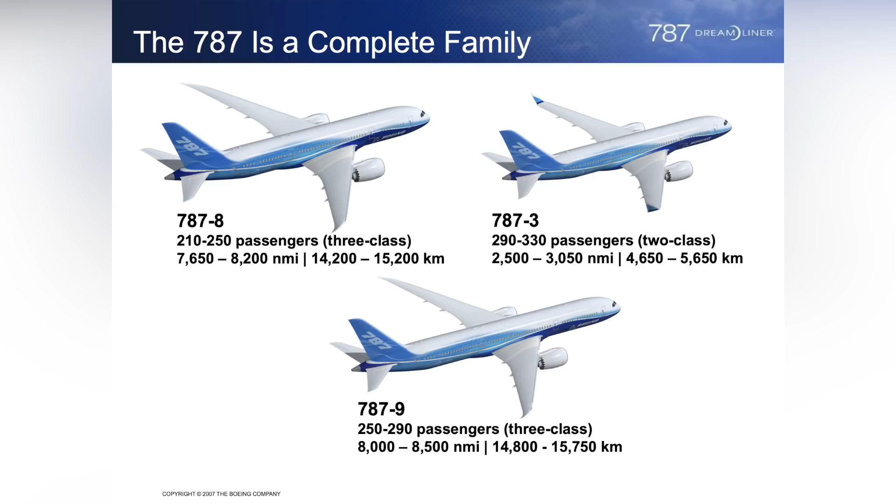So the whole concept of this airplane came to pass with respect to how do you build a 787? And more effectively, how do you develop the supply chain for the 787? You've got vendors all over the world. You've got two different build sites for the assembly of the airplane. You've got Everett, Washington, and Charleston, South Carolina. At that time, we had the 3, the 8, and the 9. The 3 never got built, and they built the 10 instead. So, in simplest terms, we had a lot of pieces that had to come together in many places.

The 787 was built because of market need. Boeing doesn't build anything unless they think they're going to make money with it, or at least sell them. Making money sometimes is a benefit, but with respect to the 87, there were a lot of promises made that didn't happen because I don't think people really appreciated the whole depth of the program. New techniques, new materials, new engines, new flight controls, just a whole new airplane. So there were lots of different things that happened, and the market was strong to build these airplanes.

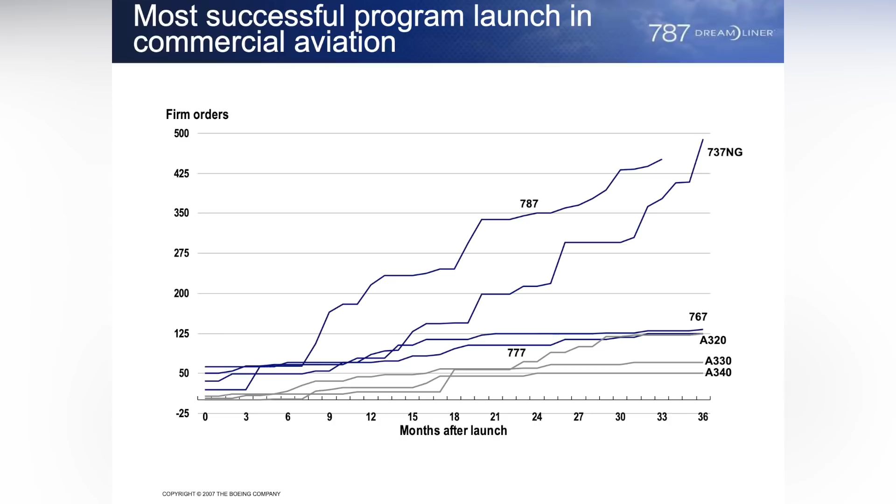We predicted that there were lots of customers. They sold like hotcakes. People wanted them. They had firm orders right at the beginning for 514 airplanes from 43 airlines. And there were more and more coming on all the time. But the airplane was progressing slowly. So at least the build cycle had to be as efficient as we could make it. So it was the most successful launch in history of the Boeing company.

The schedule, as you can see, changed because they predicted the thing would fly in 2007. When did it really fly? 2009. It was supposed to deliver in 2008, delivered in 2011. In the meantime, airplanes were stacking up and stacking up. So again, how do we get those pieces together? And one thing we'll talk about is the fact that there were sub-assemblies that came from all over the world. And we had to have the ability to ship those sub-assemblies to Boeing and do it efficiently.

So as you can see, we had to build a very big airplane. Are we going to certify this airplane? Is this going to be a restricted airplane? Is this going to be a limited use airplane? How do we do this? They needed volume of 65,000 cubic feet. That's 3 times the capacity of a 747-400 and 50% more than an Antonov 124.

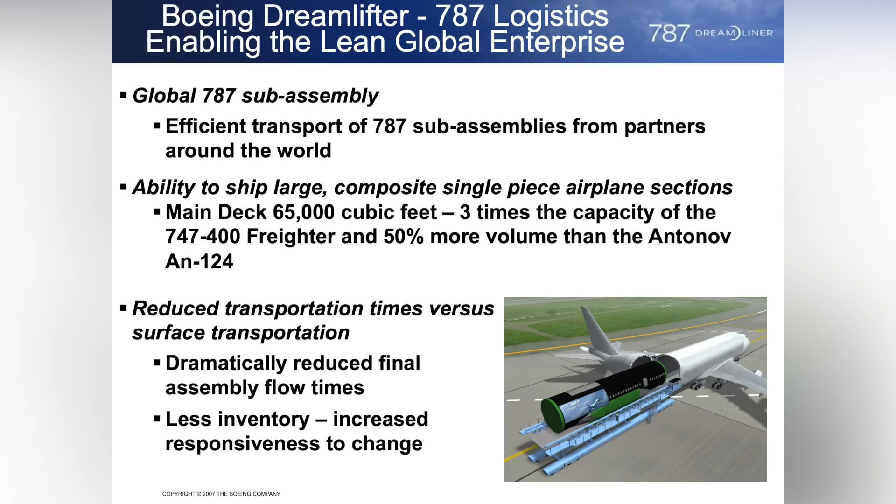If we shipped that material by barge, it would take weeks. So we flew it. We had less inventory that we had to keep on at the facilities. We had no corrosion issues to worry about with respect to hauling things by barge. That was always foreseen as a backup, and there are, believe it or not, docks at Charleston and at Everett, Washington that could handle a barge with parts. They were built just in case.

So where did the parts come from? You can see they came from all over the world. The trailing edges came, and they were able to truck those. The center fuselage came from Alenia, which is in Italy, near Naples. Forward fuselage came from Spirit in Wichita, Kansas. The main landing gear came from Kawasaki Heavy Industry in Nagoya.

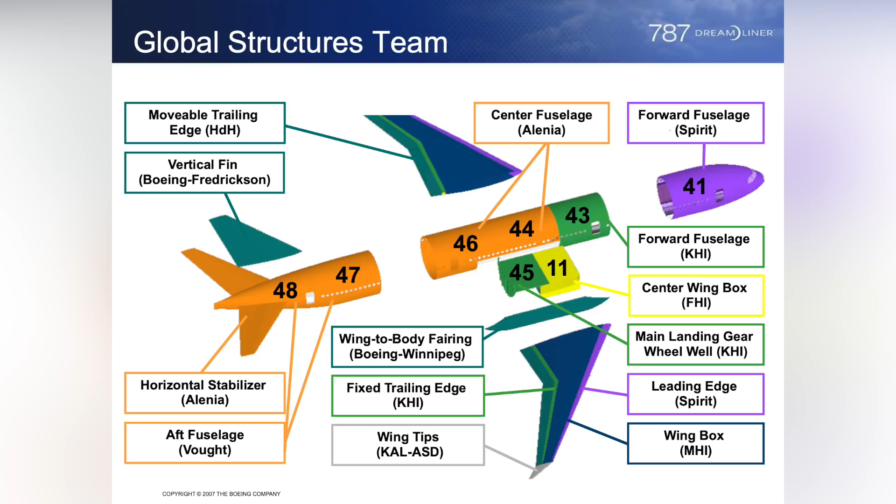Leading edge devices also came from Spirit Wichita, the wing box from Mitsubishi Heavy Industries, KAL-ASD did the wing tips, and Boeing Winnipeg. Other parts were bought, and some parts were actually built by Boeing. I know it's amazing, what a concept.

So, how do you move that many parts from that many people, building it efficiently? It's not easy. So, believe it or not, this is one of those legendary designs that came up more or less around a coffee table with a lot of wine.

At least that's the legend. I'm not sure that really happened because nobody drinks at Boeing because it would be illegal.

So the airplane was put together and we built a route structure, and how did we do this? How did we get these things apart? And you can see that it was somewhat convoluted looking. On the right side of that slide, you see the little Nagoya parts coming out of Nagoya. In the center of the slide, the parts coming out of Italy. And then on the left side, you can see the hop, skip, and jump across the United States between Wichita, Everett, and Charleston.

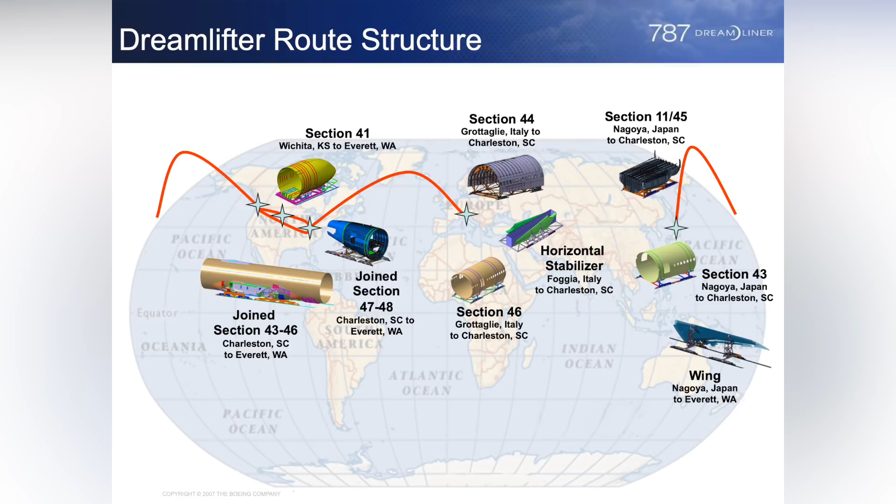So we can kind of get a grasp of the size of some of these components. Those are big fuselage pieces. So where did we build this thing? Well, Boeing didn't have the capacity to build it. We were building 87s. We were building lots of other airplanes there at the time. So, guess what? They went to EGAT in Taipei.

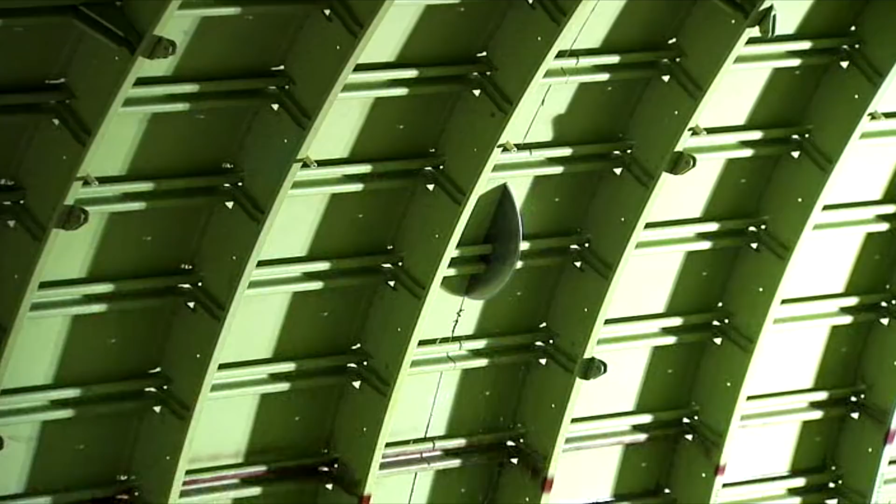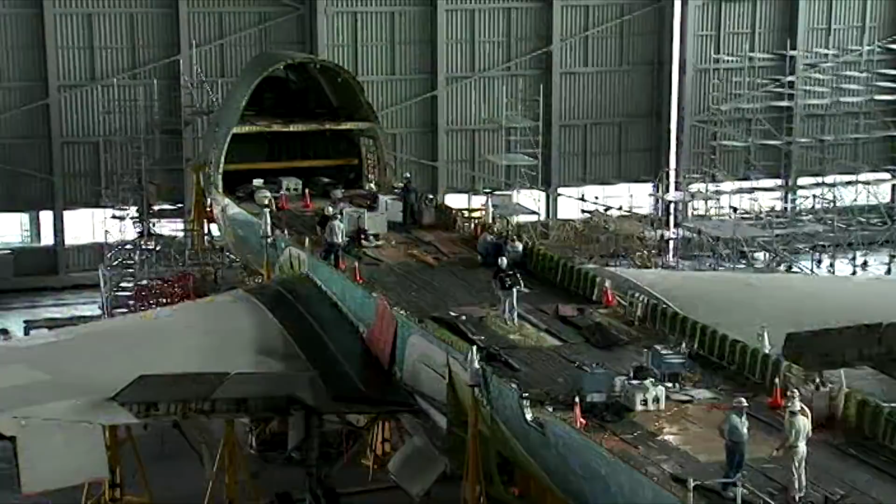It's a Boeing flatbed. That's a pressure bulkhead. I'll talk more about that later.

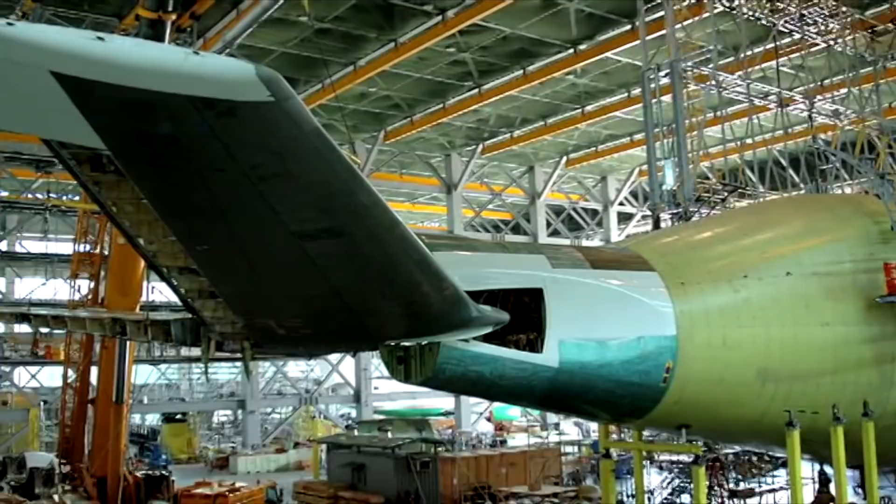Let's talk about that video now a little bit in detail. The donor airplanes were 4 used passenger 747s. 2 from China Air, 2 from Air China. That's a little confusing, I know. One's mainland China, one's Taiwan. That's interesting in itself.

And they chose them for availability because freighters are really hard, or were hard at that period of time to really get. And they chose to use this airplane because what the heck, we're going to take it apart so much anyway. There was no sense in trying to take a perfectly good brand new freighter and then cut it up. That just doesn't make much sense.

You'll notice that, and maybe it'll be apparent in some of the later videos, aerodynamics was not a big issue. Volume was the issue. You'll see there are hundreds of 1-inch round head cherry rivets all over that airplane. They're in the boundary layer, so it doesn't really matter.

The airplane itself had a max takeoff weight, as you can see, around 800,000 pounds. Max landing weight, 575,000 pounds. Zero fuel weight, about 535. It's a pretty empty airplane. We used 4056 Pratt & Whitneys. The radius of that structure that you saw is 148-inch radius.

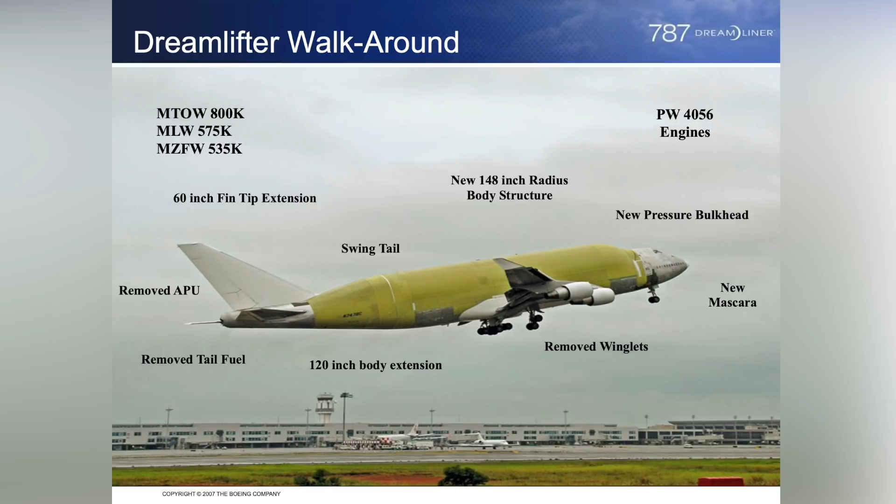There's no APU because the airplane is only going to go to Boeing facilities. It's only going to a fixed number of places, and so the ground support equipment is there. One less maintenance item. Diverts are an issue. The airplane does transit Anchorage with one of the loads, and nothing's coming off, so you don't need any cargo handling equipment.

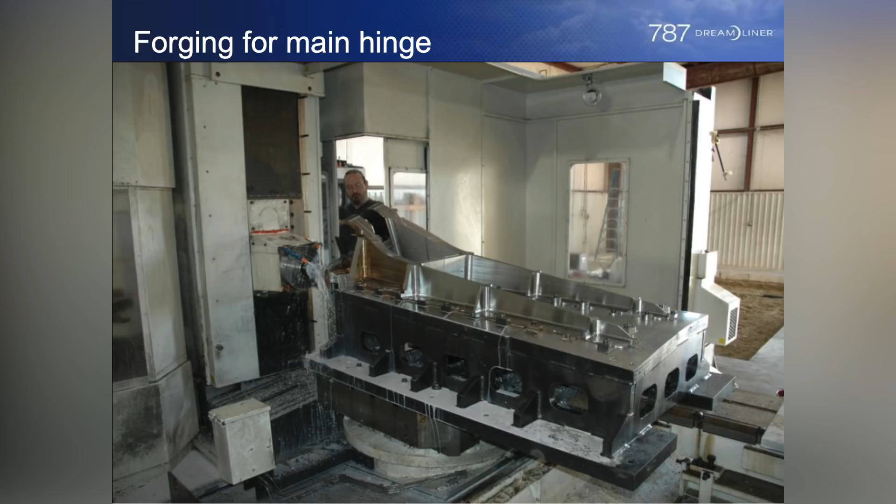A very unique way of handling cargo, and we'll get to that in a bit too. The cargo handling power and swing tail power are all on the ground support side. It's a very interesting concept. There's the forgings for the hinges. There's 2 of these forgings. Each one is capable of 40,000 pounds. It's all done from a solid piece of steel, all milled, all put on there, and that's what holds the swing tail.

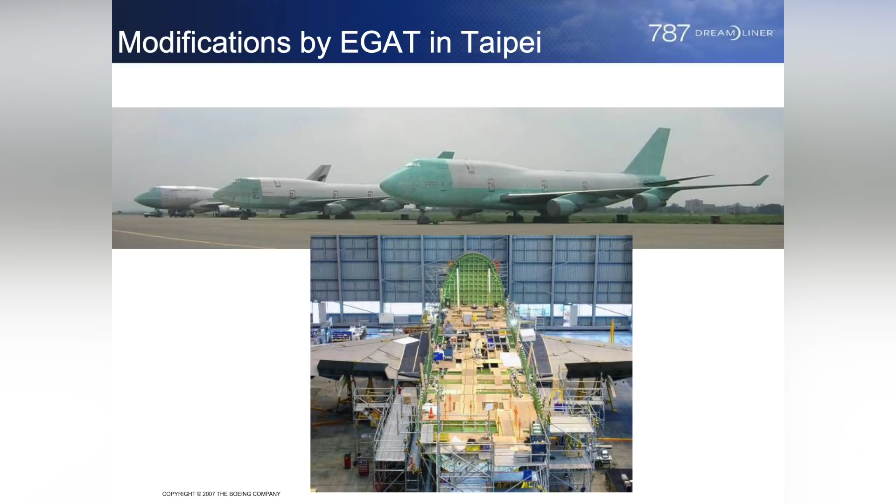That's the part that was cut out of the airplane. The bottom picture shows you the airplane with that removed in the factory floor, on scaffolds, getting ready for the installation of the structure. It's kind of the flatbed look. You know, if we could fly it that way, I'm sure Boeing would like to have done it. We could have probably put anything on the back then.

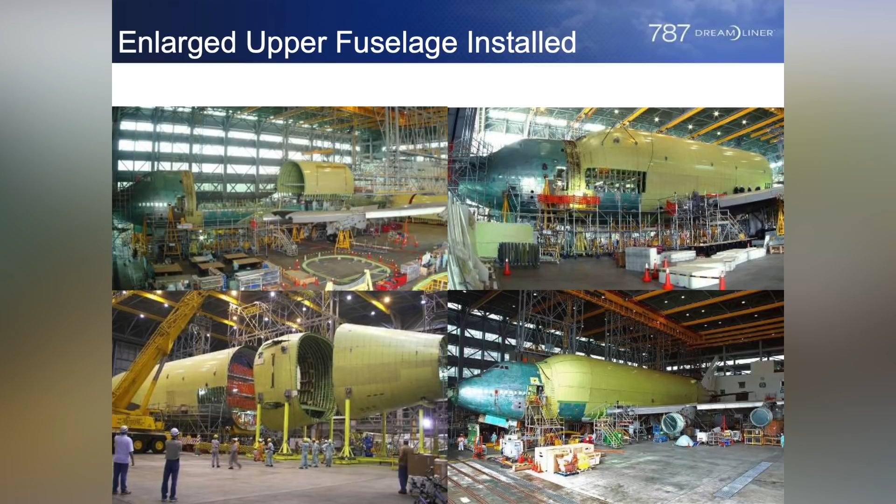So installing the upper deck was really a major effort, as you saw in the videos. The factory was really clean. You had the people, they had the equipment, and not to say they didn't struggle with the first airplane. We had design issues and engineering issues as well as manufacturing issues. Anybody that's been around this business for a while understands that and knows it's really hard to do it in your own facility. Try doing it in somebody else's facility.

They're not used to our process, we're not used to theirs. We want it built to our process. They don't understand our process. English is a second language. Lots and lots and lots of different issues here that came up. But the learning curve was steep, but the learning curve was done well. Airplanes 2, 3, and 4 were really clean airplanes out of the factory.

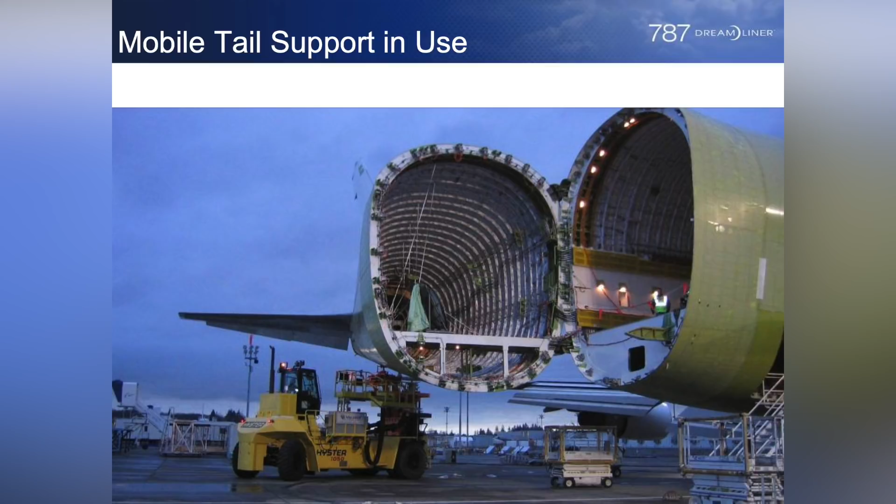One of the things I talked about was the swing tail. The swing tail itself is problematic because you've got flight controls that run through that swing tail, and you have to maintain rig. You wouldn't want to have to re-rig every time you landed someplace and loaded or unloaded cargo. So they solved that, and they solved it well. The airplane seems to hold rig.

The large Hyster forklift there on the bottom, which is huge, by the way, is the power, hydraulic power for all the loader, hydraulic power for the swing tail, and any electrical power having to do with the cargo handling equipment. All comes off of that one rig.

It's a monster. As you can imagine, swinging that tail off of a single point, jack point, and trying to maintain loads is really critical because you can bend a lot of metal with that big rig and that much mass. So there's software, fly-by-wire software in that tug, believe it or not, that manages all those loads and dynamics to make sure that as it swings, the arc is true and the loads are within limits. It's pretty cool.

Somebody said, "Do you want to drive it?" And I said, no, I didn't want to buy the airplane. No.

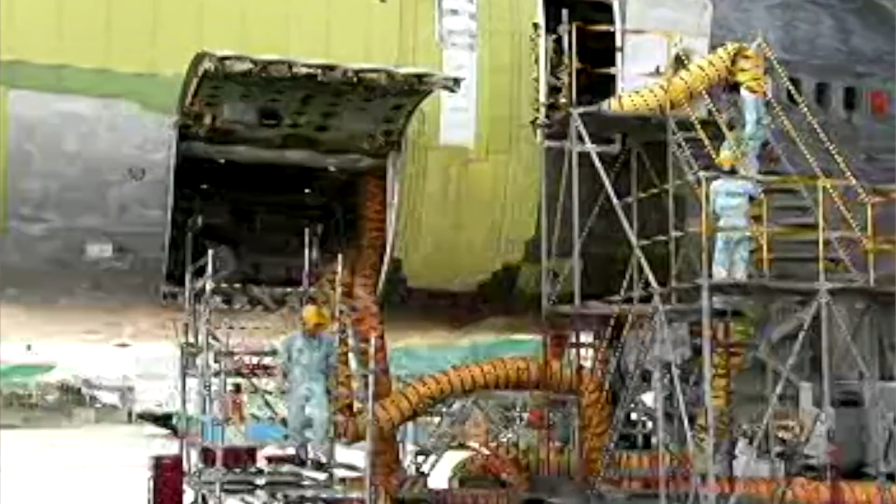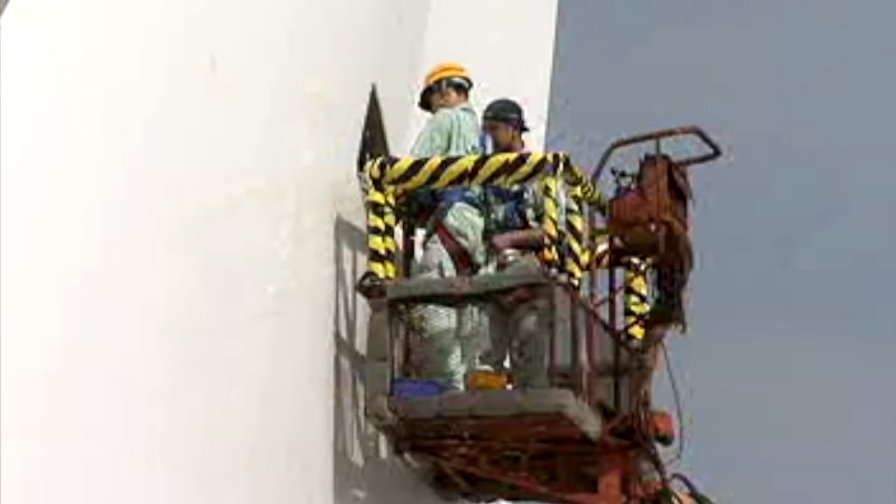So the first flight was done in Taiwan as well. In fact, we flew 4 flights over there. There's those cherry rivets I talked about. This is a picture I call Darth Freighter. Really hard to get a picture of the size of this thing, the volume of that cavity.

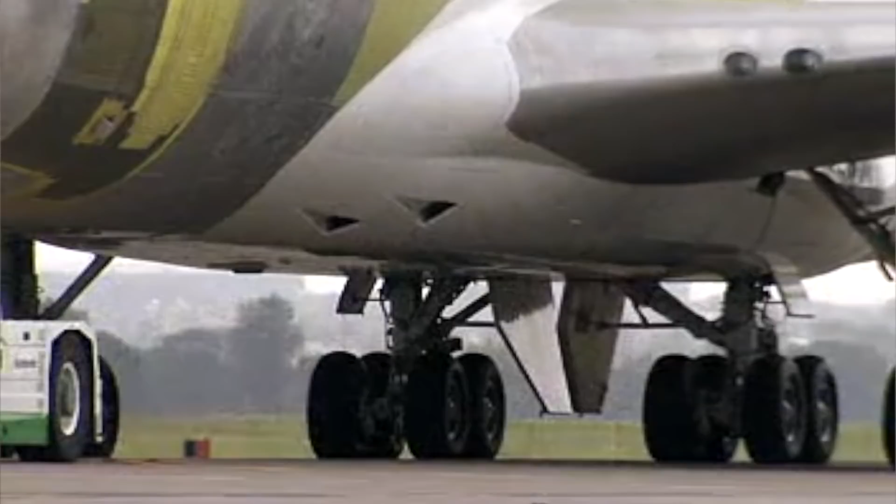Joe McDonald, who was the chief pilot for the 747 at that time, and Randy Wyatt was the first officer for that flight.

So one of the things that was important on this program was that the airplane needed to fly just like a 747. One of the goals and objectives was no additional training. It's a 747. And from the flight deck it is. But how do you do that? And you sort out the issues that are unique to the airplane, and yet allow anybody with a 747-400 type rating to fly the airplane.

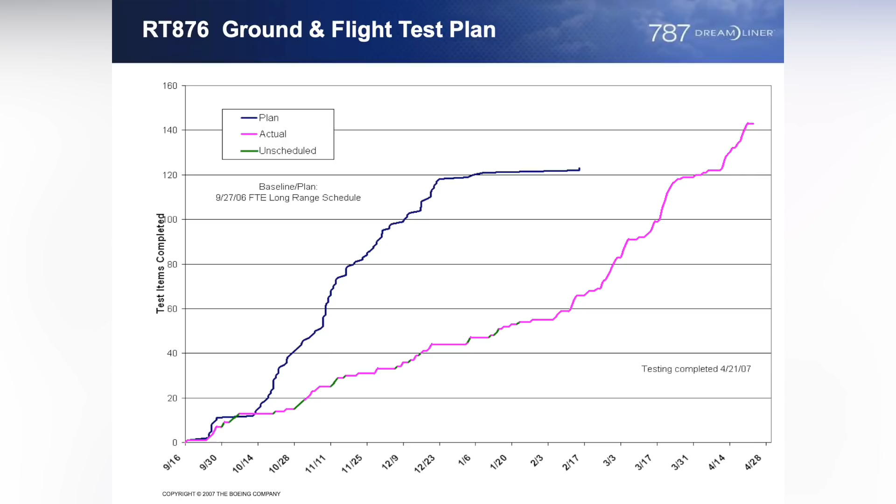So we had this wonderful plan, and as you can see, the blue line there was the plan, and the magenta or purple line is what actually happened, which really isn't too bad. If you figure the flight test average is about 20% over what's estimated, because you find things.

Fly rate, pretty high fly rate, about 58, I think it said 58 flight hours a month, something like that. Falls in the middle of a lot of the current programs, not as high as some programs, but certainly more than others. You can see here is that rate and where it falls. Large cargo freighter, the numbers in red, and the others are several different models. The highest flight rate basically was on the 757-300 program.

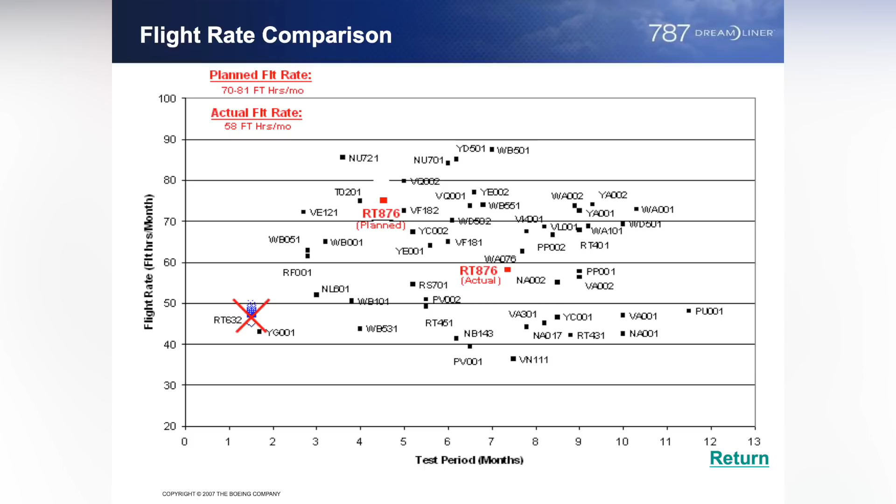That was an extraordinarily high flight rate, and I never want to do that one again. It's just too hard. You get too tired. Your people get too tired. Your engineers get way tired. And you see here the footprint, and you'll see that it's really pretty aggressive. We started in July and we finished in April.

That's pretty impressive. And the big slowdown item was, I won't call it flutter, we'll call it a large limit cycle oscillation. And we've seen LCOs in other 747 programs along the way and have had to solve them. We found the vibration on really the first flight, and then we flew it enough in Taipei that we felt comfortable with it to ferry it over to Seattle at a reduced flight envelope.

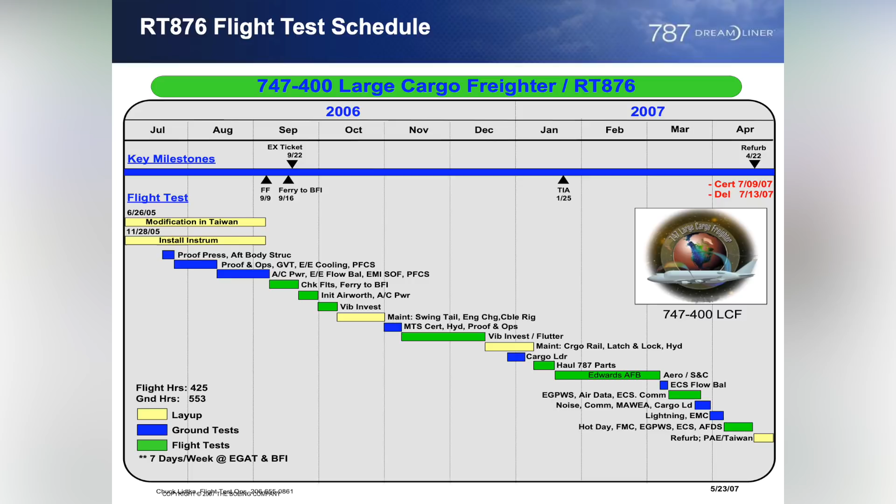And then did a little flutter investigation straight out of the box in Seattle, and then we had to work on that issue, worked on other issues, other parts of the airplane, and then solved the flutter problem. So how do we do that? 2.2 hertz was the frequency of the issue. We saw it on the first flight with the rudder kick, and it tended to hang on.

We did. How we solved it was moving the load inboard, unloading the outboard span of the wing. So we reduced the outboard tanks 1 and 4 fuel by 50%. And we removed the winglets, and that unloaded the outboard section of the wing. And we moved that load inboard, and it seemed to solve the problem. It wasn't that simple. Anybody who's dealt with flutter understands that sometimes you do something and you create something else.

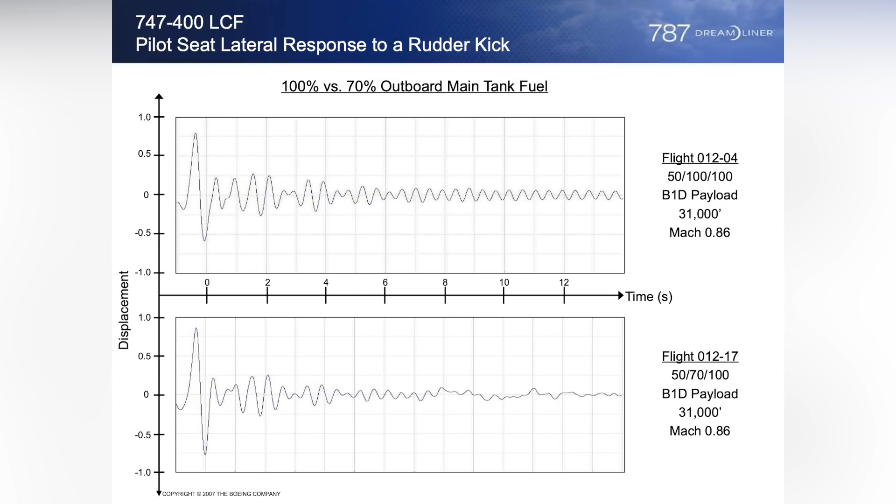But it was right at 0.86 Mach. Well, somebody says, maybe you just reduce the Mach by a couple of hundredths and you're okay. I'm not sure what the agreements were with the FAA, but I think the FAA was pretty restrictive, and they said if you're going to build these airplanes and do just a limited flight test program, then it's got to be as good as. So, believe it or not, that means the full envelope of the 747, which means for the endpoint at VD or MD, you've got to be out at 0.97 Mach with the airplane.

Getting this airplane to 0.97 Mach was really hard. Between 30 and 25 degrees nose down, full throttle, and you're coming down rather quickly, and you're accelerating rather slowly, and you're trying to hit the altitude at the point, and if I did this with my hands, the airplane would stop accelerating.

So basically it was get there, make your input, and recover. People that have flown A-6 Intruders talk about the fact that the A-6 Intruder has no limiting Mach because you can't make it go any faster even if you're diving straight down. So I think this is probably in that same order. We solved it, we made it work.

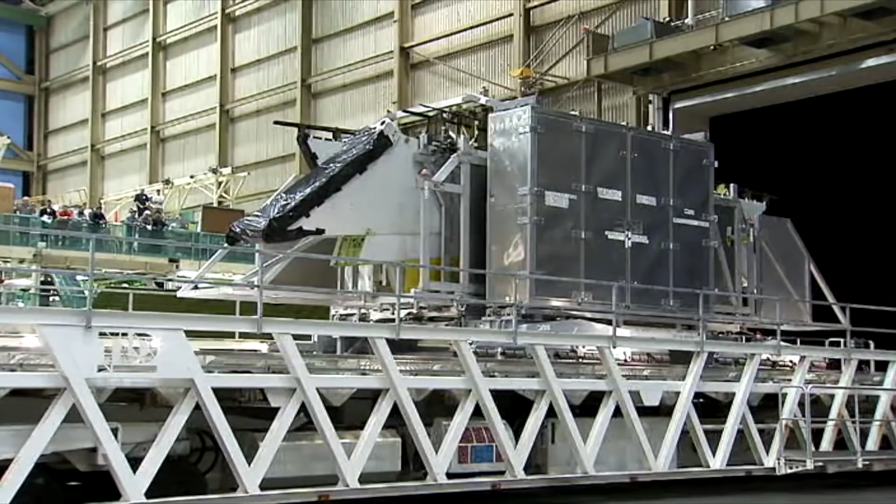So this is what it looks like in use. Looks nicer with a paint job. Here's the loaders. It's amazing to me when you stand inside the airplane and watch the load coming on and off, how fast it's moving when it comes on. I would have slowed it down a little bit myself, but these big loaders are amazing. These are all like space stuff.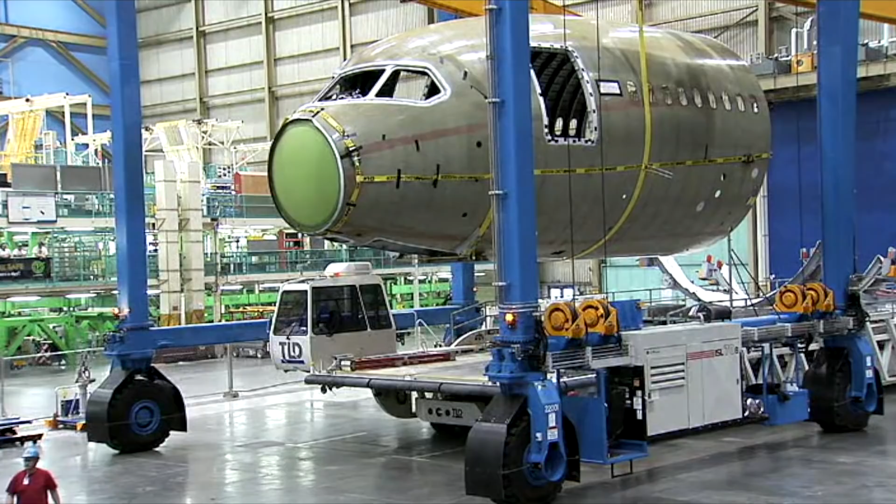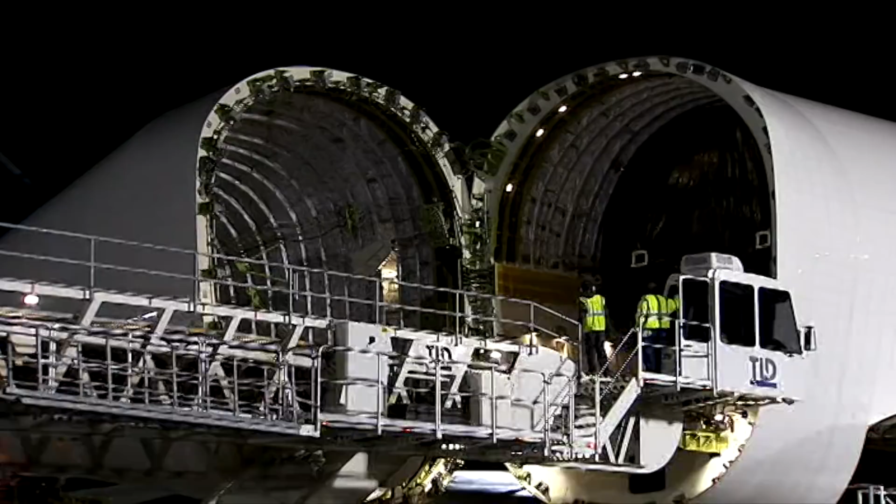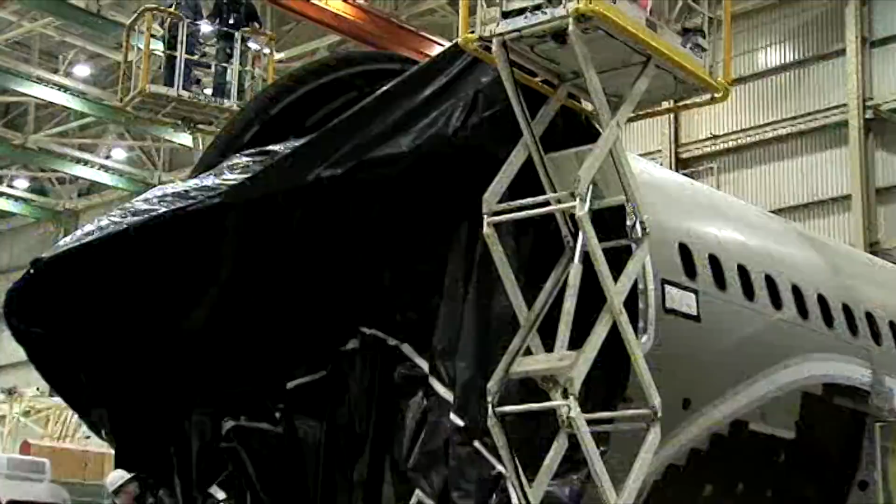This is actually the load the fuselage was designed around: the wing. The wing is the most difficult load with respect to the radius. And with the wing, there's also a fuselage section that goes on that load, and that's the heaviest load. It's interesting, composite does not look like aluminum.

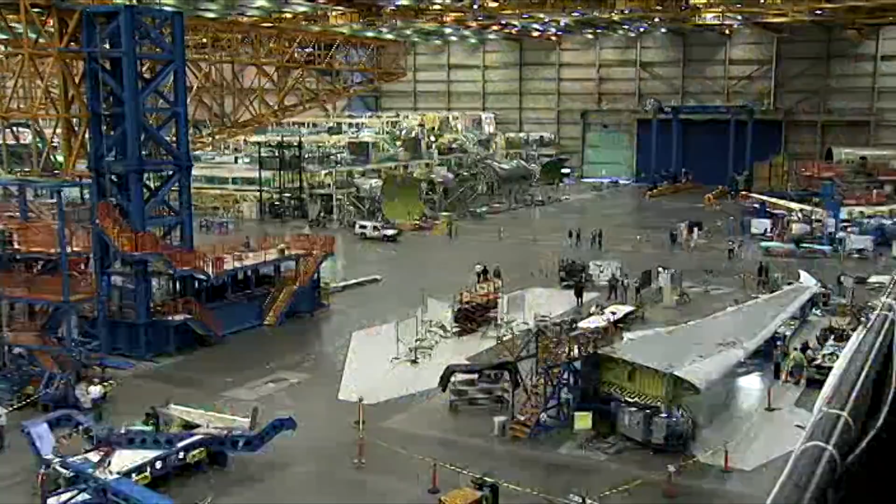If you saw that same area today, it'd be full of airplanes. So when we talk about the 787, we have to talk about this airplane. There are 1,464 present orders on the 787. They've delivered 882 airplanes. Each airplane takes 6 loads. At a rate of 14 airplanes a month, that's 84 loads a month, spread between 4 airplanes. And you figure that one of those airplanes is probably in a C check or rotating D check or something all the time.

So there's talk of a 5th airplane. So far it's been okay. There's talk of re-engining the airplane simply because Pratt & Whitney's got a later version of the 4056 that's got better specs. So that would all be helpful. And because fuel prices in Alaska have gone up, Alaska has for the first time started charging sales tax on fuel. And so a 747 full of fuel is being loaded. So they'd like to be able to bypass Fairbanks, or Anchorage rather.